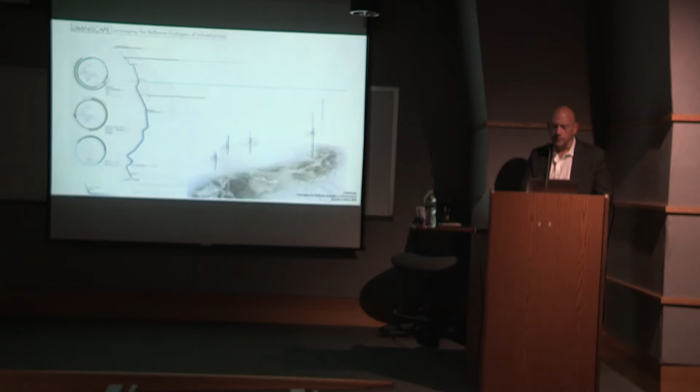So whether it's water and power systems, drinking water systems, debris basins, we were looking for the ways in which, even though these things were highly engineered, highly controlled, they actually had a dynamism and life. And we looked for ways to project that and represent that through the work we were doing with students.

And so all these things were how I began to put the practice, the teaching, some of the research together. They were all the different kinds of starting points for where we've gotten to.

And it's led to projects like this, a speculative project that'll be published in the LA Times in a couple weeks, that looks at shutting down one of the freeway stubs and remaking it as a social and environmental machine. So really turning the freeway on its head—freeways that shed water as quickly as possible, now this one becomes a collector of water. Freeways that generate carbon exhaust emissions now have elements that actually catch and capture smog and carbon, clean up the air, and put the carbon back into the ground. So something that's in many ways a kind of machine for urban, ecological, and social life in the heart of one of the most contemporary and evolving and energetic cities in the world.

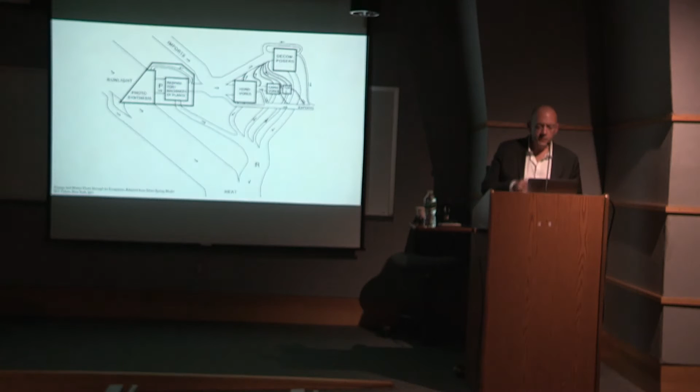The new worldview is that things are always in a state of change, and in fact ecosystem health is measured in terms of an ecosystem's ability to adapt and change over time. There are folks like Odum who were looking at this very early on—this is 1971, on energies and flows through ecosystems. This is present in some of our own work.

It's actually a diagram for a park, a small waterfront park on Cape Cod. It's called State Shift, but the whole idea is how do we impregnate a park with the ability to shift states—from dry to wet, from inundated to windy and dry, or what have you. In fact, we set up 7 different scenarios we could imagine, and designed the park to change and adapt itself according to whatever set of conditions arose at the time.

It's not an idea that clients are comfortable with. You can't—a client's telling you to build a thing, and it's got to look this way, right? So it's not something we emphasize to public clients in our work, but it's something we build into the work, so that the client 10, 15, 20 years down the line isn't stuck with a project that suddenly doesn't work. It's already starting to adapt over time.

And these sort of interests led to the book that Will was talking about, with Nina Marie Lister. Nina Marie is an ecologist and planner, I'm a designer, and we really took this on to ask what is the state of the art here. Ecology has been a topic for the last 20 years, so how is it we start to look back at how that evolution happened, and also take a look at where we are now and where we're going forward?

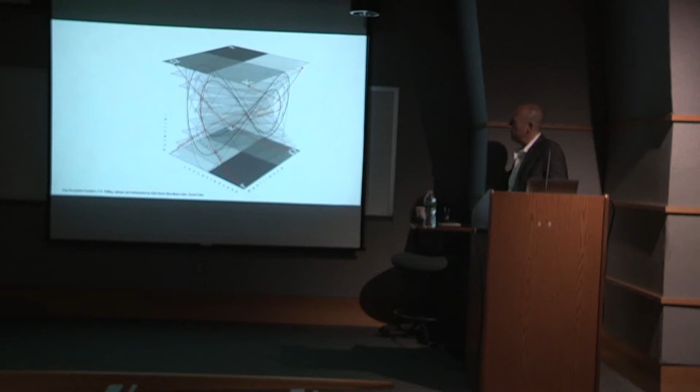We thought his drawing—and this is Nina Marie, not just the designers—didn't quite capture the 3- and 4-dimensionality of what Holling himself was trying to draw in 2 dimensions. So we took the opportunity to redraw things, looking at new software programs. This is Aquaveo, a water flow software program. We're looking at new technologies as a way to rethink how we work in response to this ever-changing world.

We take these issues on in school, at the scale of the city, at the urban district. For a number of years, we were working in Jamaica Bay, Queens, New York City, a really dynamic environment. On one hand, we're looking quite deliberately at change over time—you can see maps of the area and the various natural and human-influenced processes that change the shoreline.

The nature of water flows within the bay, and the way students were proposing reseeding dynamics within the bay through an earth-building strategy that would engage directly with water flows and dynamics out there, setting the stage for land building—which in turn would set the stage for a very light urbanism that could continue to change over time and reformulate itself as sea level rose and fell and environmental dynamics shifted.

So there's work here that's groundbreaking in saying it's not just landscapes that change, but how do we design these principles into new urban fabrics that can always be responding to those environmental changes over time.

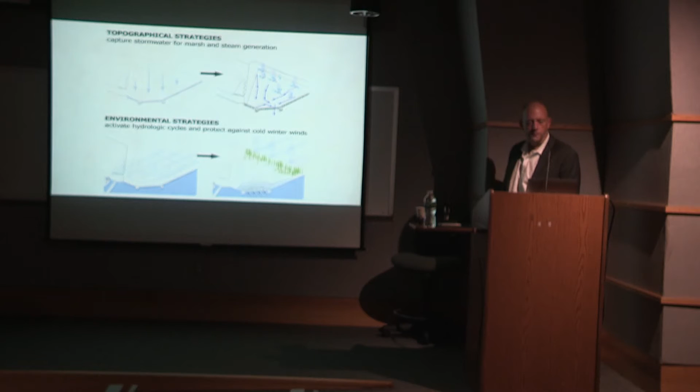We were very interested in topographic strategies that would redirect stormwater, and in environmental strategies that would, on one hand, buffer from cold winter winds, but also allow the dynamics of the river to enter quite literally into the public space.

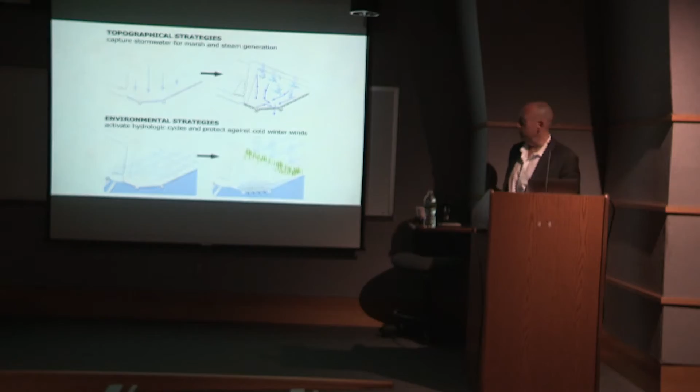The project's quite simple. It's a grove of trees on one end that gradually gives way to open lawn and eventually to a lowland marsh.

You can see here how stormwater is collected on the site, allowed to infiltrate, so that water goes into the groundwater or into the soil first—it's cleaned before it then goes into the groundwater. Excess water runs across the site and is collected in this lower area, which allows us to put in place a native marsh that the infrastructure here once displaced.

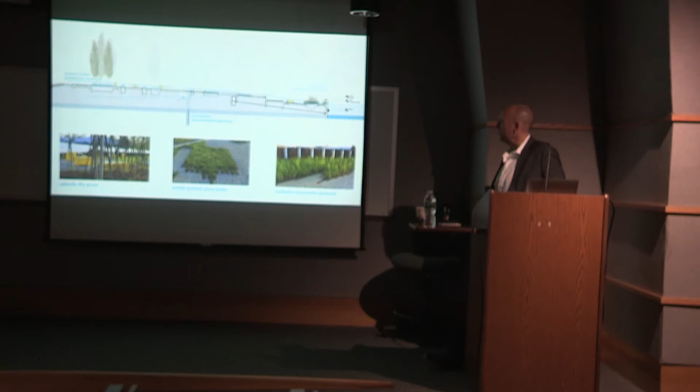In this case, the infrastructure is revealed. We've lowered the grade behind the wall to see the contrast between the infrastructure, giving legitimacy to the infrastructure as well as to the ecology. But the infrastructure is quite functional too, buffering this soft marsh from the wake of recreational and industrial boats moving past the site.

So here you see how the site steps down—this is the marsh, I think in late spring, early summer. The marsh floods quite regularly in these lower areas, so you see the presence of water and make the connection to what's going on.

You have this incredible series of blooms throughout the year. And we also set up this material relationship between the old rusty bulkhead walls, the really soft, lush, beautiful plant material, and then these new bench and lighting devices made out of fiberglass. So we're as interested in a kind of

material dialogue in this case as we were in the pure functionality of the environment. For us, that's where the real design comes in. It's not just making good and healthy environments, it's also layering in explicit design references, sometimes quite subtle, but in ways that allow things to come to life and get them out of just the ordinary.

And so it's a very passive site. It's really just a place to hang out and watch the activity of the river or watch the activity in the marsh. And for these guys, a healthy environment means more fish, and it means more fishermen catching fish to take home. So that's a kind of environmental version of flux.

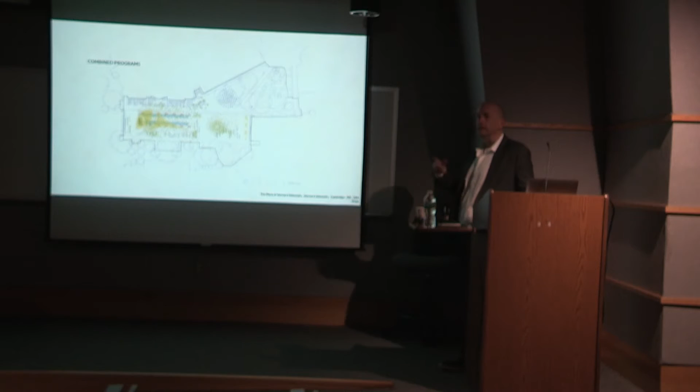It was also designed as an event destination plaza. And so there are a whole series of things inscribed into the plaza — utilities, tent foundations, water, power — all these things that actually allow the plaza to come to life in different ways. In fact, we inscribed across the surface many different kinds of programs, anything from crafts fairs to farmers markets, to art fairs during the summer, to large-scale performances, more formal performances, student boxing matches — who knew? Caught that one day.

Ice skating, curling. Apparently one winter, some Canadians were in charge of the programming for the place and got some curling mats out. It's been used as a place of memorial. It's been used as a place of protest. So it's really come to life both in a programmed way and in an informal way.

People have really kind of adapted this project to their own uses. And, more conceptually, we like to develop our own scores of how the activity ebbs and flows over the course of the day, over the course of the season. But the ideas inherent here in a social space are very much linked to those ideas of flux and dynamic and changeability that we were seeing with some of the ecological projects and in that first project as well.

More recently, we're taking that, adding to it at the West Louisville Food Port. This project, OMA is designing it out of New York. It's a food hub, food distribution center, food processing, indoor vertical farm, community kitchens, food entrepreneurship, food retail.

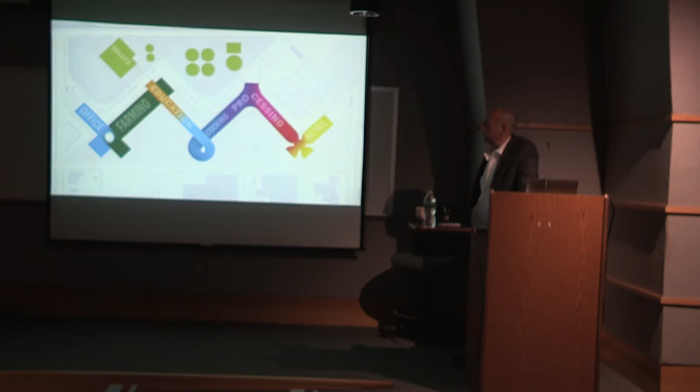These are some of the internal uses, and the idea was that there would be a relationship between internal and external uses as well. External, really creating a series of dynamic public spaces that could be used in a number of different ways - a market plaza for various farmers markets and art installations, and temporary growing or long-term nursery operations, or over the longer term, the idea that we could begin to create a series of vines that would grow hops and other food products for use by some of the merchants right on the site.

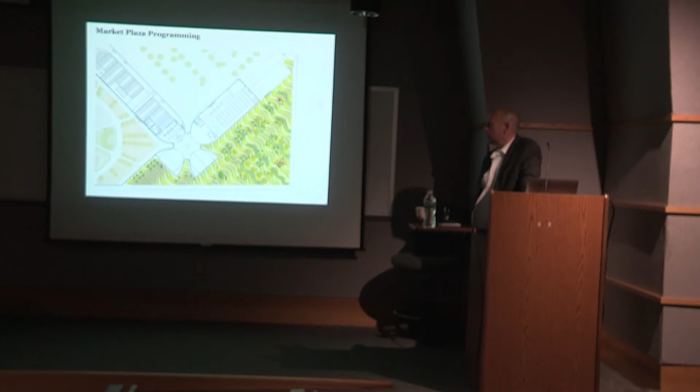And the idea that the plaza would be designed, again, to be flexible, to come alive at certain points and to be quiet at other points. The Jefferson Plaza, designed almost like a slice of an orange. The idea that this would be the main gathering space, event space, performance space.

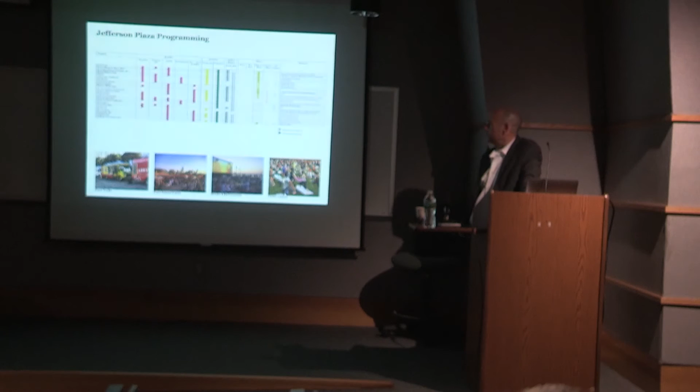So there are a whole series of programming ideas that are embedded into the design of this space, all revolving around a central space here with a collection of different landscape types. It's almost certainly programmed to accommodate different tents and events and community food festivals. But in the center is this kind of wagon wheel of slices of landscape.

It's like you can find your own slice of landscape, whether it's a hard surface with paving, whether it's a bumpy rubber surface, whether it's a hill with flowering trees, or a wood deck that you can sit and hang out on and sunbathe. There's a piece of landscape for everybody in the center.

So it's really quite playful. The colors are intentionally quite vivid, in a way that brings it to life. And the newest version of this has the surrounding tree planting all made of fruit and nut-bearing species.

An outdoor play area, a demonstration farm where the Jefferson County Extension will be on site, demonstrating how to develop an urban farm in urban neighborhoods on contaminated soil. So a kind of educational and demonstration facility as well.

And so all of these are now taking that idea of ecology, taking that idea of social adaptability and pushing it even further into a dialogue about bigger questions of sustainability and resilience and food sourcing. Where do you get safe and healthy food when you're in the urban environment? So a much broader response to the question of urban resiliency.

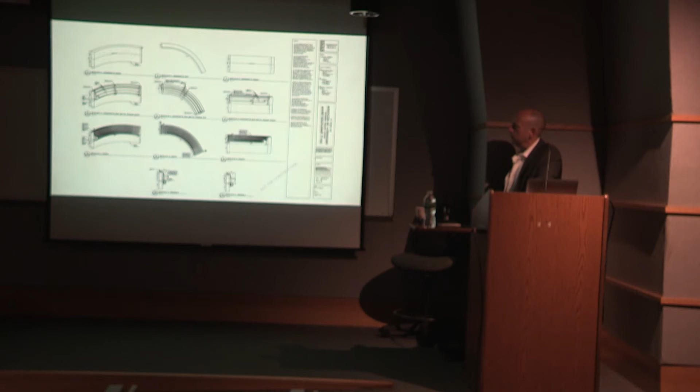We've been exploring through furniture, other really quite luxurious benches here, but we're also testing this in school, looking at how you generate landform in response to water flows and social uses. This is some student work looking at iterative studies of landform in relationship to water flow, water inundation, and

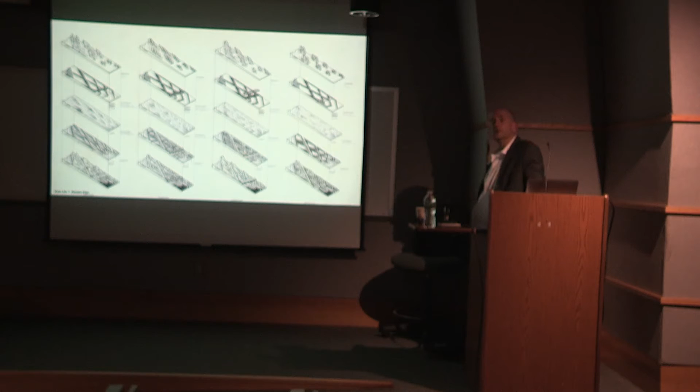how landscape can begin to function hydrologically, ecologically, and create some pretty robust landscapes at the same time. We're then taking that into the realm of the city as well, to say once you begin to develop a foundation of landform and infrastructure, you can begin to use those same tools and technologies to build buildings and urban fabrics on top of those. These are typological, so that if a set of conditions change, you have the same kit of parts, you just rearrange them in different ways. This one happens to be quite influenced on the ground level by flow of water, and up top the way the buildings are cut are all influenced by sun angles at different times of year that allow those buildings to perform environmentally really quite well. So it may look funny, but it's actually performing quite dramatically.

A third category—what time is it? 7:45.

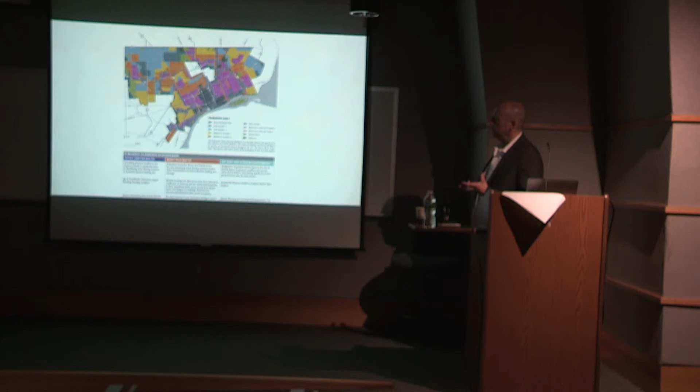So some of the most intensely vacated, low economic potential areas are the purple areas, whereas some of the stronger, more settled, occupied areas are the darker and medium blue areas. So there are a whole series of conditions on the ground, and this is where we said, look, we imagine this urban fabric changing in a number of ways.

We're not going to plan 130 square miles of fabric. But what we are going to give you is the tools. Once you identify what the initial conditions are, you then have a series of options for how you develop landscape and urban typologies for that future in ways that improve environmental health, improve community opportunities for community interaction, that provide jobs, that provide new forms of economy, using landscape as an asset and landscape as a key.

Detroit and cities like Detroit have opportunities that cities like New York, Boston, and San Francisco don't have. They have land. So here the opportunity was, how do you transform vacancy into real opportunities for people, for environment, for micro or macro economies that could begin to emerge over time.

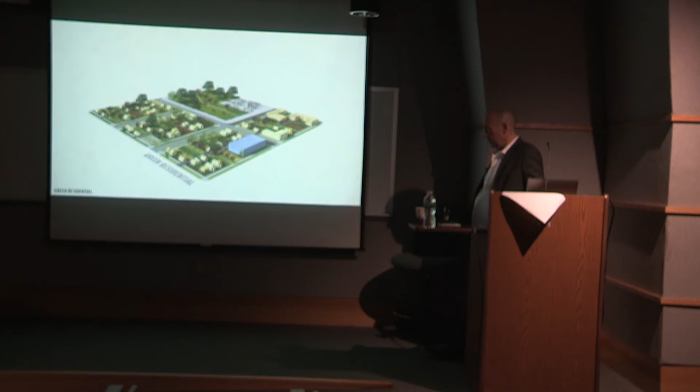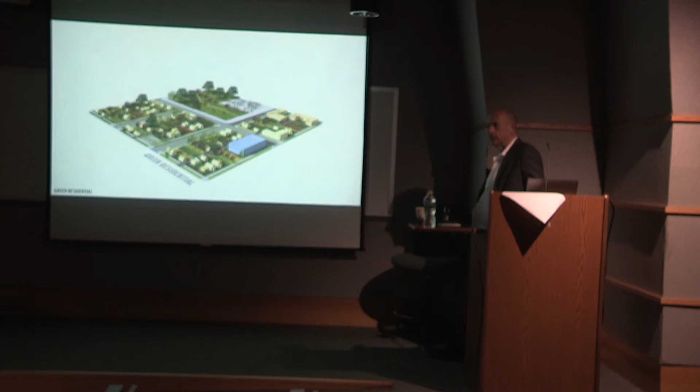So very much a system that's not really driven by the market, but is market tested. This was all modeled so that the relationship between projected property taxes generated in the areas we wanted to densify could cover the cost to service all the areas that we were imagining across the city.

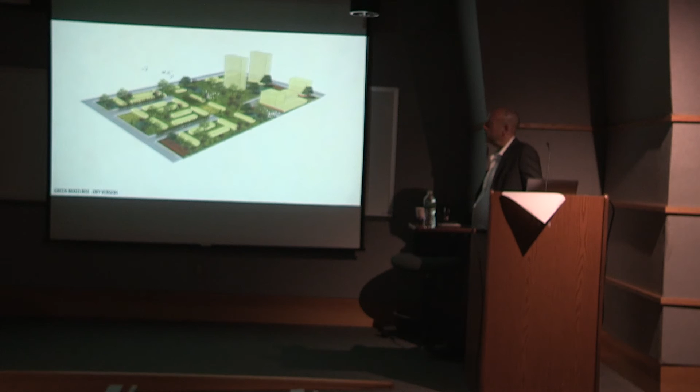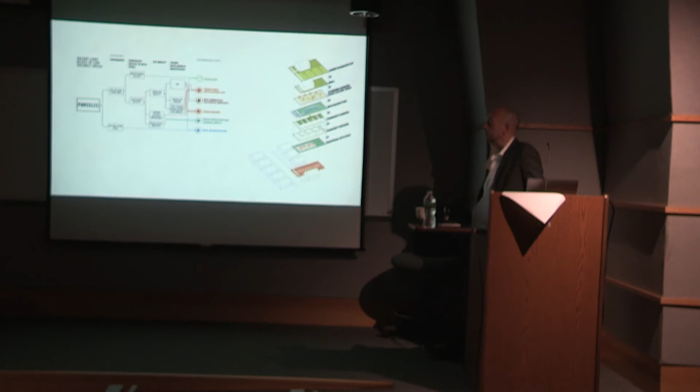So there is an economic component to this, but it's a different kind of sustainable city—for a city that's not growing, but is actually stabilizing or has been shrinking. Even down to the scale of the individual vacant lot, through a series of decision matrices, people on the ground would be able to choose between a number of different futures for each individual place. We were setting up a system and a way to begin to think through different scenarios, ultimately leaving the decisions to people on the ground.

I'm going to skip this project to get to this last category that I'm calling dynamic frames. Here I'm thinking about not single-minded, hard and fast infrastructures, but rather scaffolds that bring to light conditions or change. I'm showing Robert Smithson's Spiral Jetty as an installation, a scaffold that in many ways brings to light the environmental dynamics and change that go on in this part of Utah.

Or that establish loose frames that can instigate appropriation, growth, and change. Think of infrastructure as a catalyst rather than an end in itself. Or simply dynamic and multifunctional themselves, able to adapt to ongoing physical, environmental, social, political, and economic changes.

Very much the work in Green Bay, Wisconsin is like this. You can call this an open space, you can call it a riverfront. I tend to think about it as a piece of infrastructure—social and civic infrastructure—that gives rise to certain economic development opportunities behind it, and certainly gives rise to other kinds of social and environmental opportunities as well.

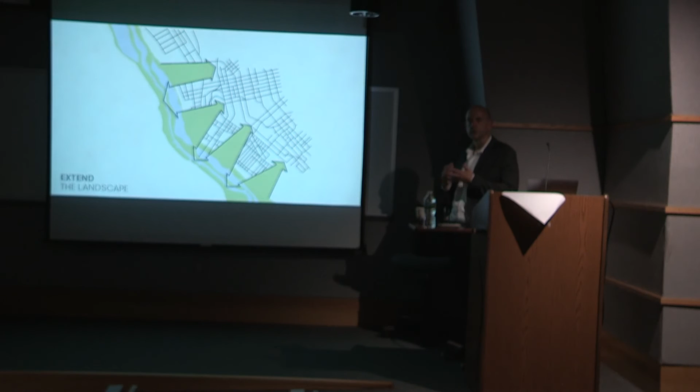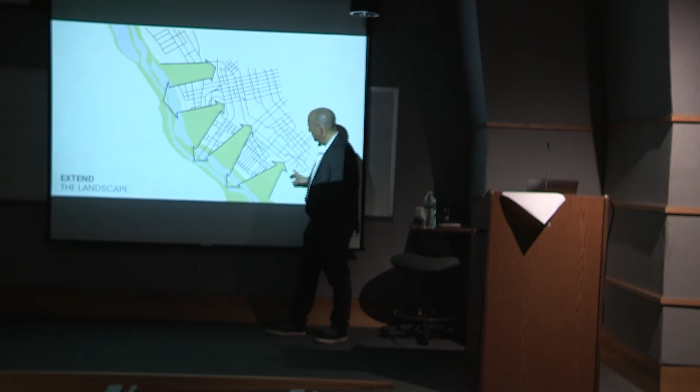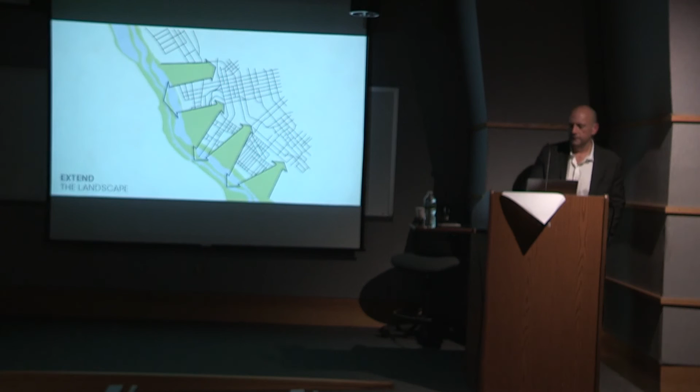and create this alternating grid green structure? In a way, you're actually creating economic opportunity because instead of the city having one face that opens to a park or a waterfront, you now have a much longer line of interface. So in taking away land, you've actually raised property value and real estate value. So it's as much an environmental strategy as it is an economic development strategy.

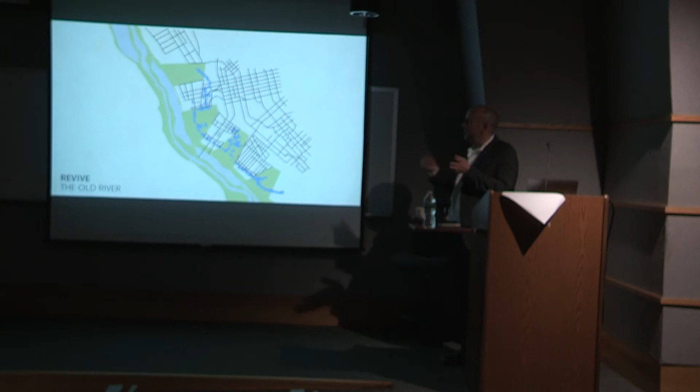And then here the question was, how do you revive the old river, which existed in these old forlorn, dirty ditches that collected all the city's stormwater before it was then pumped inside the levee system? That's the problem with levees, right? The levees contain the flood most of the time, not always. But then you have to figure out how to get the water inside the levee. And so there's a whole series of pumps and sumps.

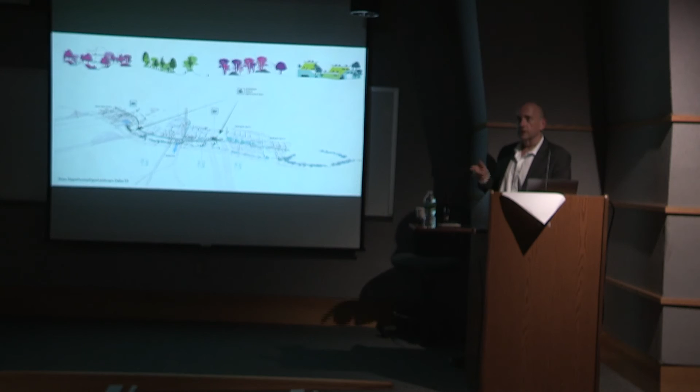We really imagined transforming that system, that what we were doing is building a series of new neighborhoods and landscapes on a refashioned stormwater system with stormwater terraces that would clean the water, polish it to the level of allowing for human contact, and yet still functioning for the flood control that it already was, and then starting to design water-based landscapes around the water system.

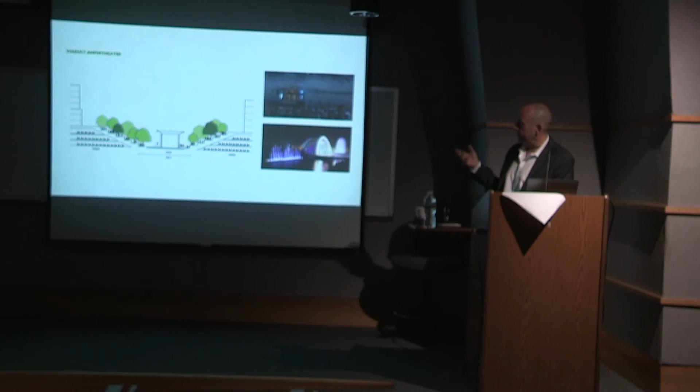In one place, we were talking about designing an urban beach right in the heart of the city, in the middle of a new design district, a viaduct amphitheater, a water amphitheater that would become the heart of a really intensely developed high-density neighborhood right on the edge of downtown, a real celebratory space for the city.

And then a third neighborhood, the Riverfront South neighborhood, built along these water gardens. So again, mixed use, mostly residential to support people who could walk or ride their bike into downtown. But using this series of water gardens, refashioned stormwater sumps as an economic catalyst that would allow for a form of dense urbanity that wouldn't otherwise have been possible in a place like this.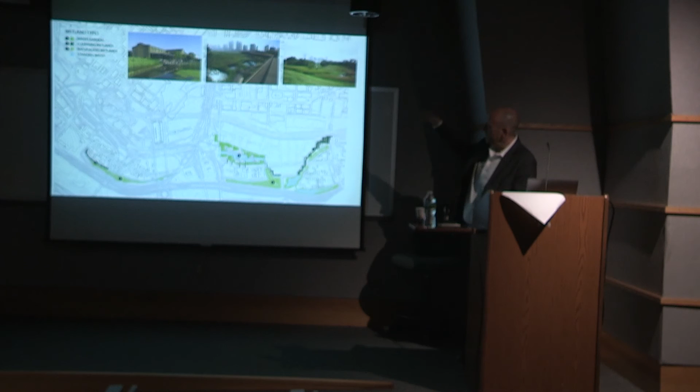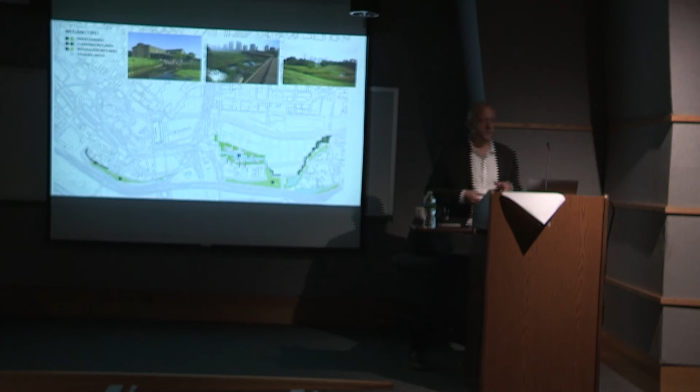So here we were capturing stormwater off of roofs from the local district, but developing a system that would allow water coming in from other parts of the city to go through a series of stormwater terraces here, here, and here. And so you capture the sediment, you clean the water, and then in this one area, you begin to design that as a much more intensely developed public space.

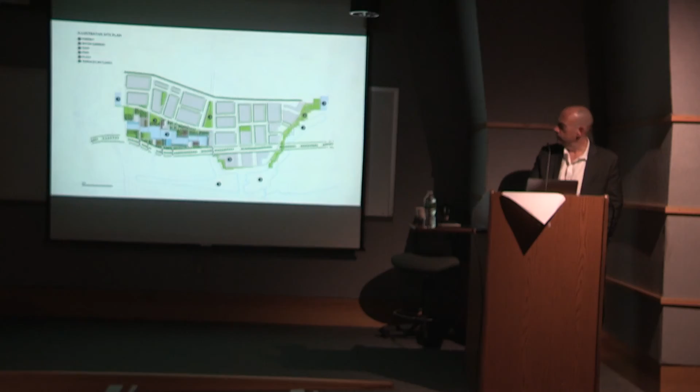This is the piece that we've moved forward with hydrologic engineers, Limnotech out of Ann Arbor, Michigan. And we're really designing this as a series of program spaces, so cafes, sloping lawns, terraces, music gardens, small gallery spaces, within a landscape that's designed to flood, and within a landscape that's designed to dramatize the flood,

so that it's safe to come here when the water is pouring in from other parts of the city, but it's also a reason to come here during some of the rainier times of the season. So here we're really taking that infrastructural resource, cleaning it up, making it into an environmental and social resource, and then dramatizing the effects of it in the everyday life of a series of gardens.

We're also embedding into this plant materials that can survive severe drought and severe flood at the same time. So again, building in a kind of ecological resilience as well, and finding ways for projects like this to co-opt some of the leftover single-minded infrastructures from the 20th century and make them much more viable, flexible, dynamic infrastructures, environmental, social, and functional infrastructures for a new generation of cities to come.

So in many ways, just to wrap up and to summarize, I think at the core of all this work is a dogged interest in the various ways landscape, living, breathing, and operative, might play a more formative role in the reimagining and remaking of cities' public spaces and metropolitan regions. In an era of climate change, rapid urbanization, social inequities, and cultural debate, landscape offers a profound and functional and inventive starting point for rethinking the ways that we live. Thanks.